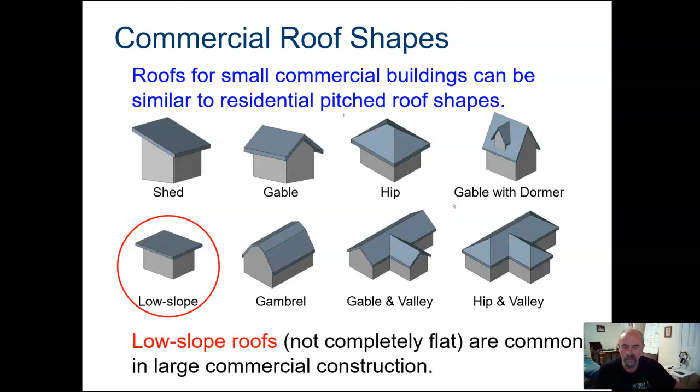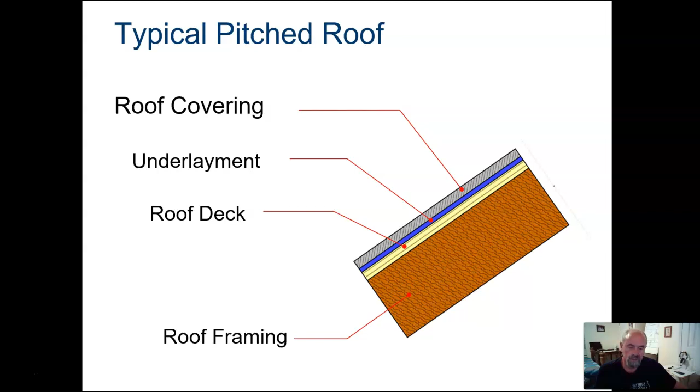The roof deck is the strength. That's the structural substrate that carries the roof loads to the roof framing. And it's typically plywood or OSB, which is oriented strand board. And then underneath we have the roof framing, which is the structural support for the roof, whatever that may be.

Some different roof coverings for pitched roofs. They can be similar to residential construction types. Standing seam metal is becoming very, very popular in the South here with residential lately. Clay and cement tiles, that's a Midwest and Southwest style mostly. Asphalt shingles with solar panels up here, if you'll notice. Very popular. Wood cedar, no, you don't see so much anymore. Slate, no, because it's so expensive.

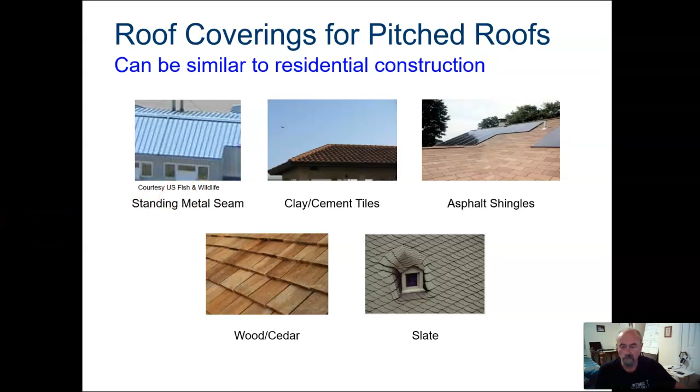Pitched roof framing for low-rise buildings is usually wood trusses or rafters. This photograph shows a commercial facility though with light gauge steel trusses on CMU load-bearing walls. Remember, that's cinder block. Okay.

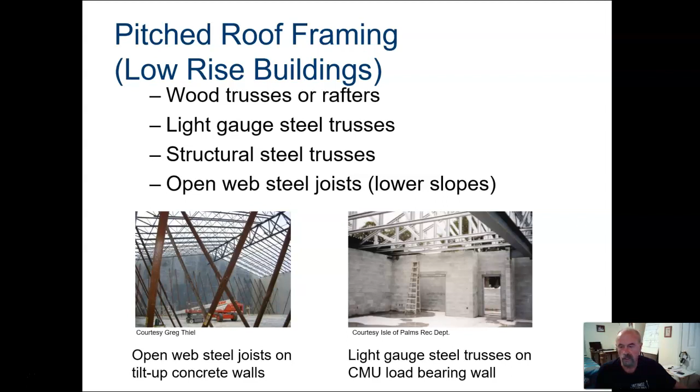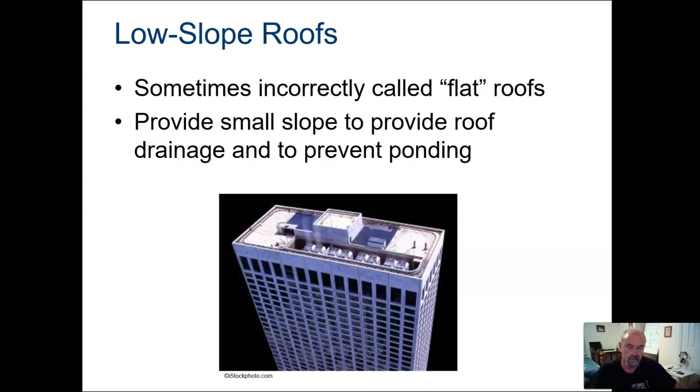Sometimes low-slope roofs are incorrectly called flat roofs. They are slightly sloped to roof drains so that the water will not stand or pond on the roof. Because water moves very slowly on low-sloped roofs, the roofing material must be highly resistant to infiltration.

Okay, so a typical low-slope roof. The surfacing right here at the top protects the weatherproofing and the reinforcement. In the red here, the reinforcing adds strength, puncture resistance, and dimensional stability to the roofing, and it's often combined with another layer of weatherproofing, one or more layers that keep the water from entering the building.

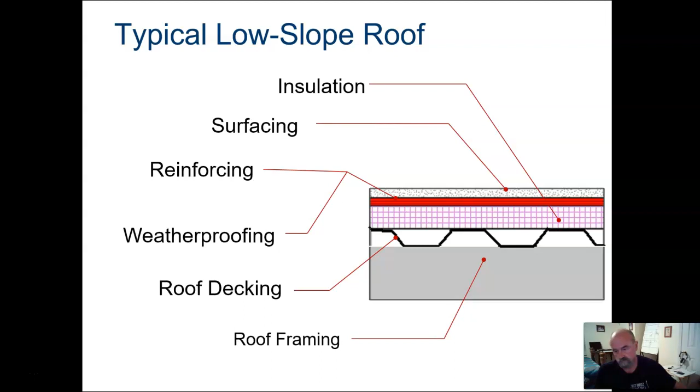The roof decking is a material used to span across beams or joists to create the roof structure. And the decking for low slope roofs is often ribbed sheet metal, but it can be other materials such as plywood. Okay.

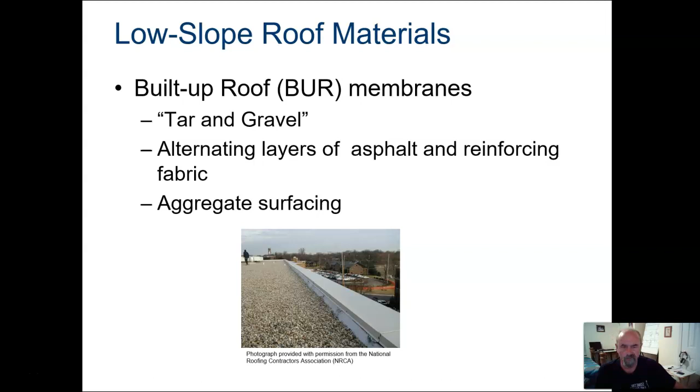Low slope roof materials: built-up roof or BUR membranes, which is tar and gravel, alternating layers of asphalt and reinforcing fabric with an aggregate surface.

There's single-ply membranes, often referred to by chemical acronyms like EPDM, which is ethylene propylene diene monomer, either fully adhered, which is glued, mechanically attached with screws, or held down by a ballast, such as gravel. The pea gravel is placed on top of the system to hold it down into place.

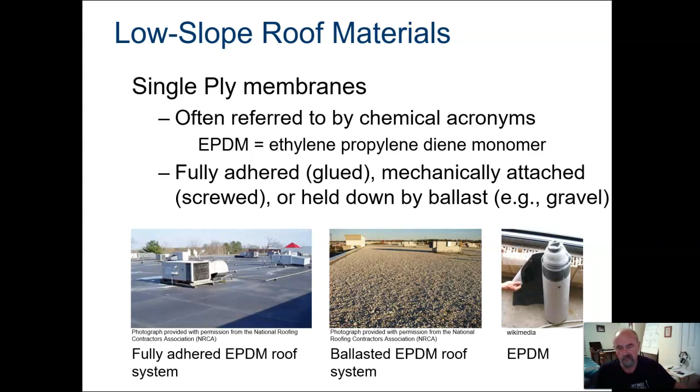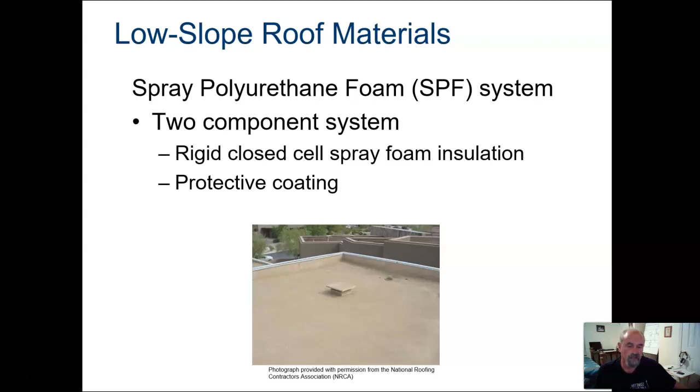Spray polyurethane foam SPF systems are a two-component system. Rigid closed cell spray foam insulation with a protective coating. And I've never seen one in person. The protective coating provides weatherproofing as well as protection from UV exposure and mechanical damage.

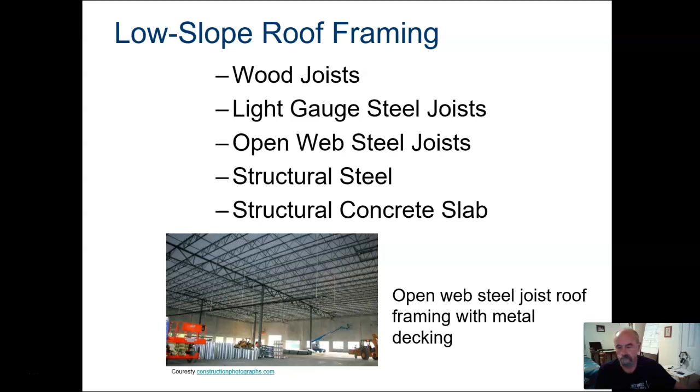The different types of roof framing. We've got wood joists, light gauge steel joists, open web steel joists, and structural steel, as well as structural concrete slab. So these are the different types that we are looking at, all right? We've gone over commercial shapes, commercial pitched systems, roofing materials for pitched roofs, low-slope roof systems, and roofing materials for low-sloped roofs.

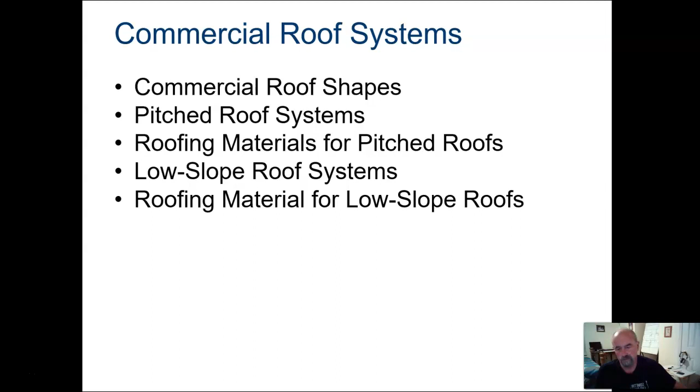Okay, now today's work is going to include some research on your part. So I need you to follow the instructions, open your engineering notebook Google Doc, and then follow the instructions in there. When you get done, send me another link to edit your engineering Google Doc, and then I will grade it and put it into the grade book.